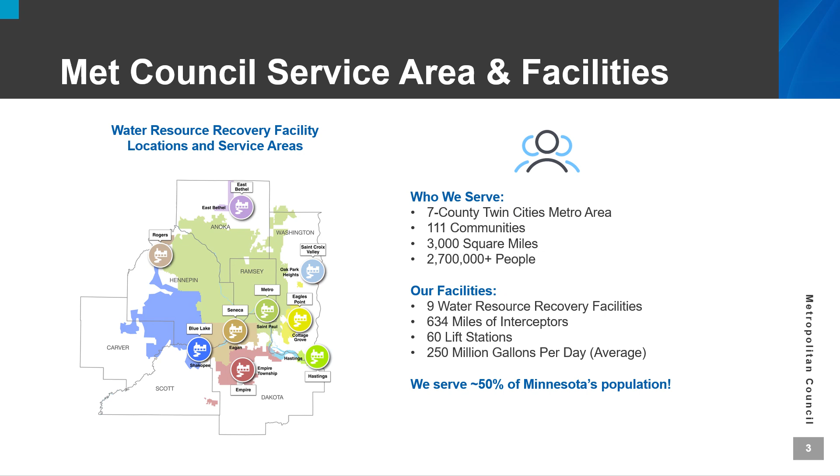Every time we flush a toilet, take a shower, or do laundry, the used water, called wastewater, flows through a network of underground pipes. These pipes connect homes and businesses to larger sewer mains, which carry the flow to a central treatment facility to be cleaned and released back into the environment.

But it's not just wastewater that enters the system. Rainwater and groundwater can also seep in through cracks or illegal connections, a problem known as inflow and infiltration. This extra water can overwhelm the system, leading to backups and higher treatment costs. Inflow and infiltration are one of the main reasons sewer repairs are needed.

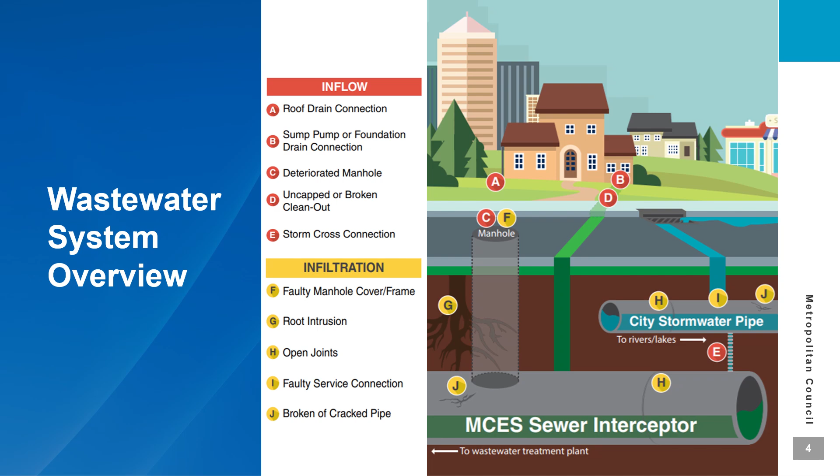The Grass Lake Sewer Relocation Project is located in the Vadnais-Snail Lakes Regional Park on the east side of Grass Lake between Highway 694 and Gramsie Road.

We plan to install a new sanitary sewer east of the existing sewer. A new trail will also be installed in partnership with Ramsey County Parks and Recreation to provide maintenance access to the new sewer. A dedicated cross-country ski trail will also be constructed adjacent to this trail.

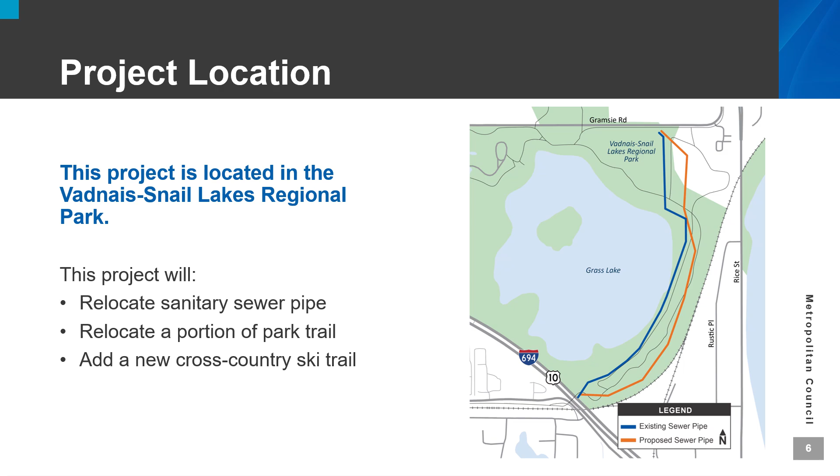Grass Lake water levels are variable but have been rising over the last few decades. As shown in this photo, the high water levels have impacted the park in a variety of ways, including the closure of the trail underpass at Gramsie Road.

Additionally, Gramsie Road and Rice Street have been closed multiple times due to flooding. The high water levels also flood over 3,000 feet of sanitary sewer, resulting in the sewer being inaccessible for emergency conditions or general maintenance. The high water levels also create a risk that the lake may drain into the sewer pipe. There is also a risk of damage to the natural environment.

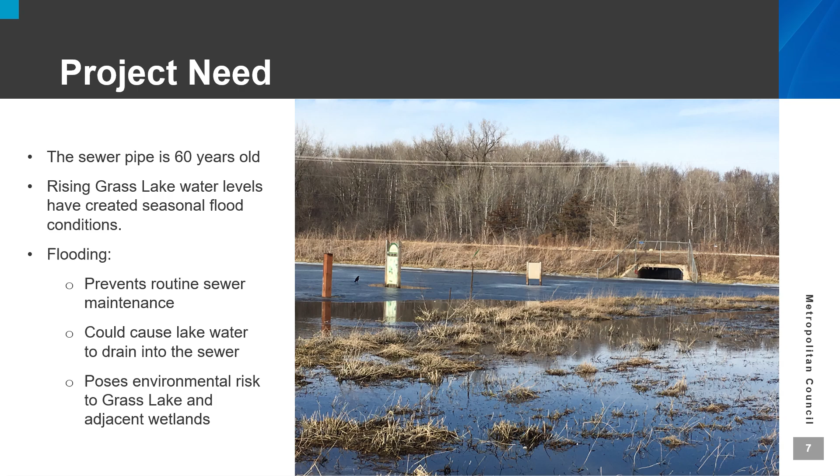This video is another example of the high water level conditions, where the lake and even fish are flowing over the trail, which is near the existing sewer.

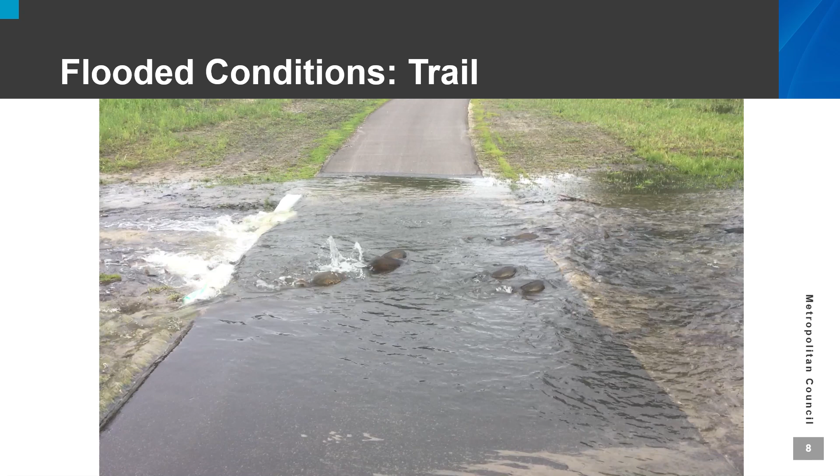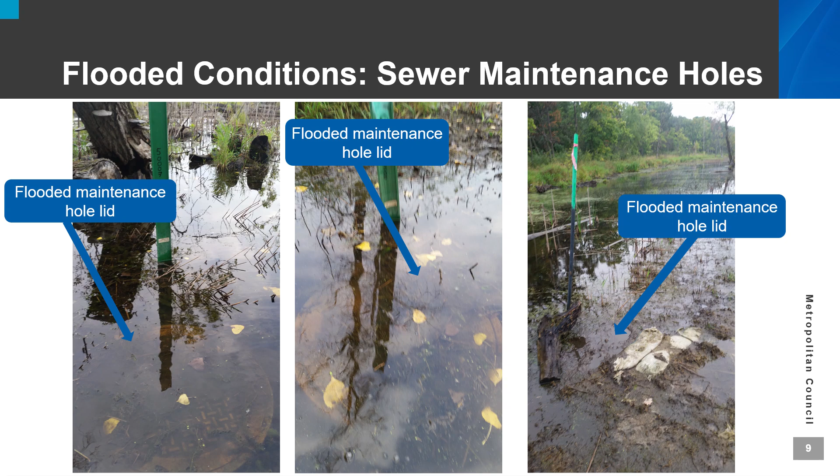On the previous slides, we shared photos of how flooding has impacted the park. These photos show the direct impacts the flooded conditions have on sanitary sewer access, where the lake level is several inches higher than the maintenance hole lids.

This project will install 4,700 feet of new sanitary sewer and maintenance holes at a higher elevation. Relocating the sewer to higher ground significantly reduces the risk of the lake draining into the sewer. In addition, Met Council maintenance crews will have reliable access to the sewer, and the risk of environmental impacts to Grass Lake and the surrounding area will be much lower.

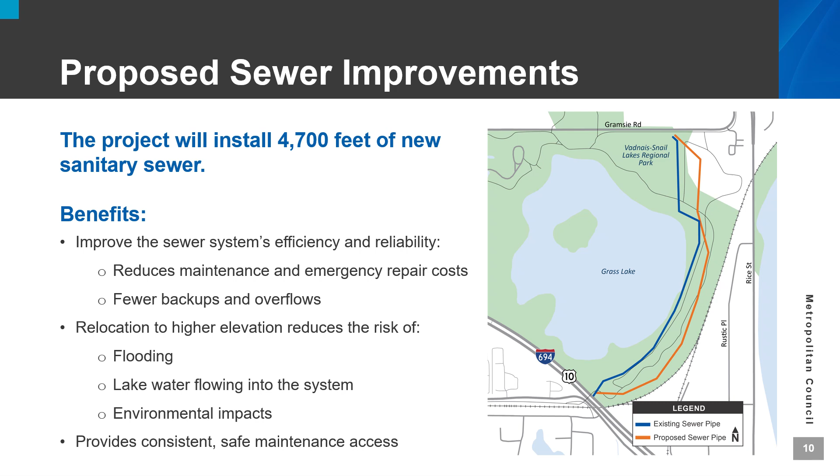As part of this project, the existing trail will be removed and a new paved trail will be constructed next to the new sanitary sewer. The trail will provide Met Council access to the sanitary sewer. It will also be wider than the existing trail, providing more room for the various trail users.

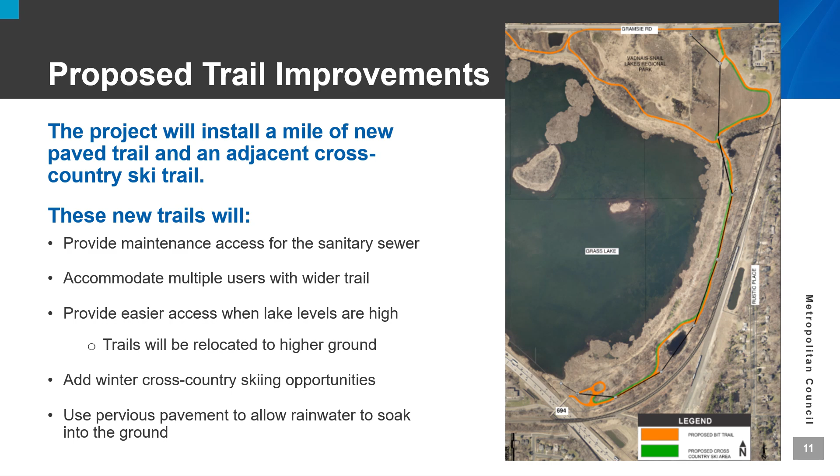To help the environment, the paved trail will be constructed with a material that allows rainwater to infiltrate through the pavement. Ramsey County has successfully used this material in several parks in their system. In addition, a cross-country ski trail will be constructed next to the paved trail.

The project construction limits are shown as a dark blue line on this drawing. As discussed previously, these construction limits were determined to meet OSHA requirements. Disturbances and site clearings will be limited to areas within the construction limits. Trees within the construction limits have been assessed and tagged, but not all tagged trees will be removed. The remaining trees within the construction limits will be protected.

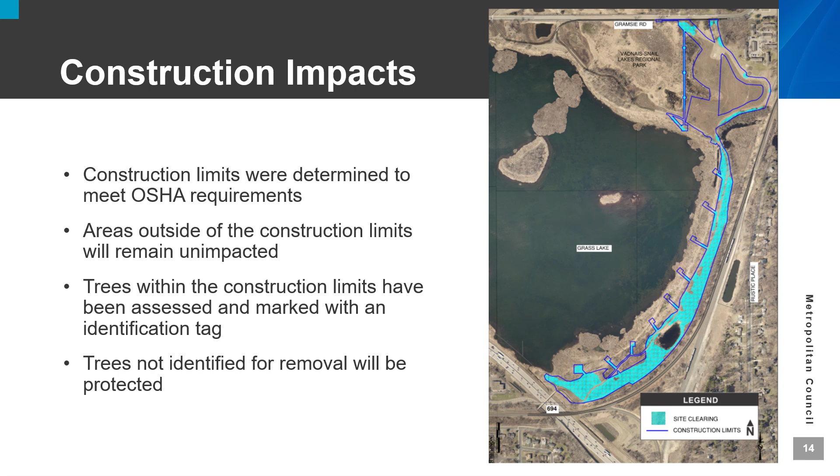Later in this video, we will share Ramsey County's plans for restoration of the park after the sanitary sewer work is complete.

Safety is the #1 priority for the construction workers and for the public. To protect the public, the trail along Grass Lake and a portion of Gramsie Road will be temporarily closed during construction. We understand this is a valuable resource for the community, but we must keep everyone safe during the construction of this project.

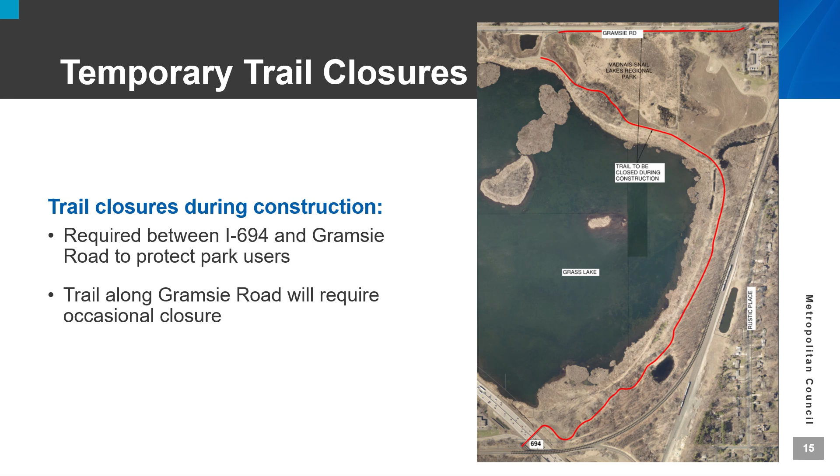More information about construction impacts, such as trail closures, will be shared at a future meeting prior to construction. During the design phase of this project, we've been working with various regulatory agencies in obtaining required permits and approvals. Agencies include Ramsey County Parks and Recreation, Ramsey Washington Metro Watershed District, City of Shoreview, Department of Natural Resources, United States Army Corps of Engineers, Minnesota Department of Transportation, Minnesota Pollution Control Agency, the Railroad, and St. Paul Water Utility. This ongoing agency coordination and partnership is vital to the success of this project.

The Vadnais Snail Lakes Regional Park spans over 1,000 acres, with the Grass Lake area comprising 271 acres. The landscape includes open water, wetlands, and more than 40 acres of oak woodlands situated on both the east and west sides of Grass Lake.

The sewer project will impact approximately 10 acres of oak woodlands on the east side of the lake, but will avoid the 30-plus acres of old-growth oak woods on the west side. Both woodland sections have undergone past restoration efforts, including buckthorn removal, native seeding, and tree plantings. These same restoration practices will be implemented in the affected area to restore the site as high-quality wildlife habitat.

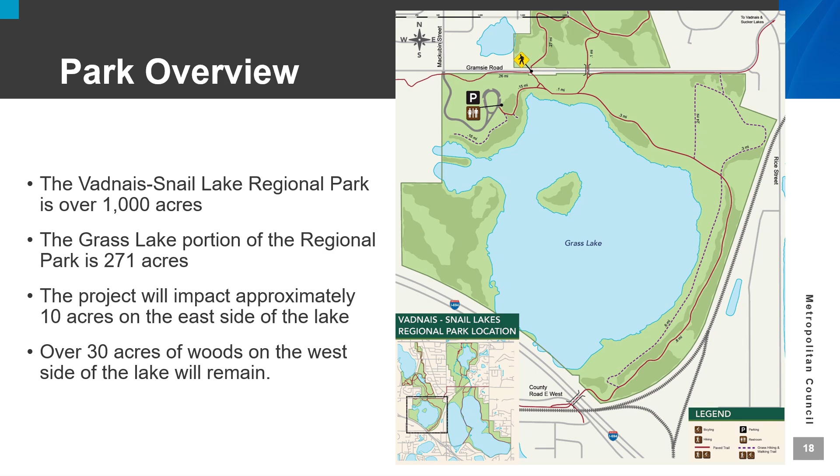Over the past decade, Ramsey County Parks and Recreation Natural Resources staff have restored more than 2,000 acres of natural parkland across our 7,000-acre park system. Their team also has experience restoring areas affected by utility work, like the site involved in this project.

Restoration efforts will begin with a detailed plan, now in development, followed by planting and habitat work once construction is finished, and continued maintenance in the years to come. The plan includes seeding with native grasses and wildflowers suited to the area's soil and moisture conditions, from wetlands to uplands. Oak trees will also be replanted, primarily from seedlings, along with some container-grown trees.

While full restoration will take several years, we are confident that with a strong plan and diligent restoration practices, the area will be successfully restored, supporting both recreational use and quality wildlife habitat.

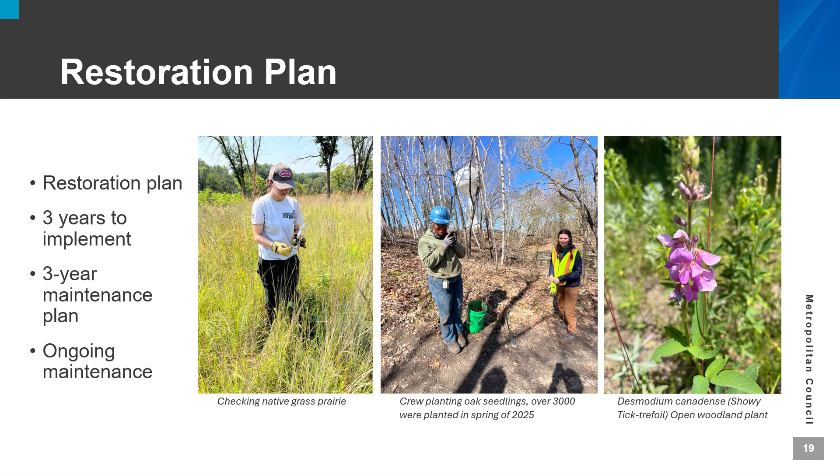We are currently nearing the end of the design phase for the Grass Lake Sewer Relocation project. Construction is planned to begin in spring 2026, and restoration will begin once construction is completed in fall 2027. Another public meeting will be held prior to construction starting to share detailed information on impacts and timing.

If you're watching this presentation prior to the July 16th open house, we encourage you to send in your questions now by sending us an email or calling the hotline. We will answer your questions during the Q&A session at the open house and share them on the project website following the meeting. Thank you for watching this presentation.